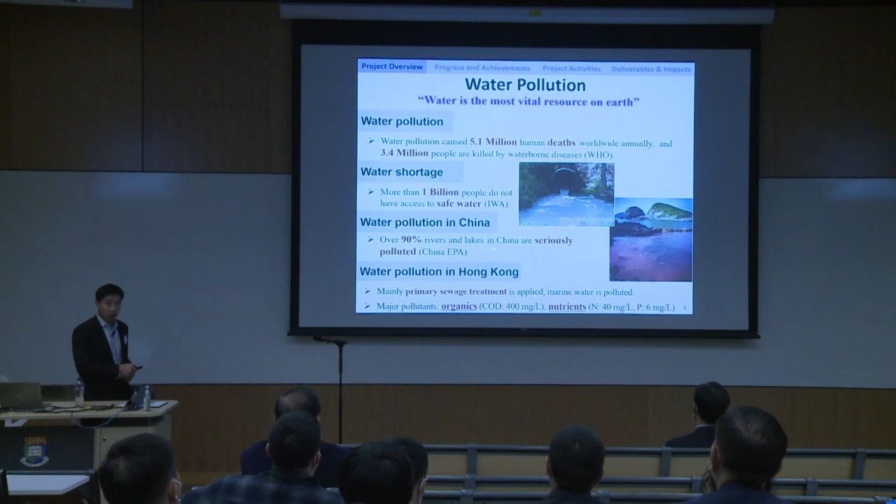It's very important because water suffers from problems like water shortage, and water pollution worsens the shortage problem. Water pollution in China is a big problem. In Hong Kong it's better, but not much better—still a problem to solve. So that's a big background.

Talking about water pollution, there is an effort for water pollution control—in our field, basically wastewater treatment. Each person in Hong Kong, and in other places in a similar situation, uses water and produces or discharges wastewater. Every single person in this room discharges like 200, 300 liters—a lot of wastewater. Someone's got to do that, to clean it up, to protect the environment.

For this effort of water pollution control, look at this—this is Hong Kong. Hong Kong discharges a huge amount of wastewater. It's not just a one-time thing, it keeps coming—today, tomorrow, 2 million cubic meters of wastewater. So current treatment is one treatment method, and what we try to treat and remove is to clean it up.

Basically it's for the removal of nutrients. From the earlier talk we learned about nutrients—they cause problems, nitrogen and phosphorus in particular, and organics. Those are dirty things in wastewater that need to be cleaned up and removed, to produce purified or treated water for discharge. And emerging organic pollutants—we didn't really pay attention to those 20 years ago, like EDCs. Now they're a focus of research in recent years because they cause long-term impact on the environment and the ecological system.

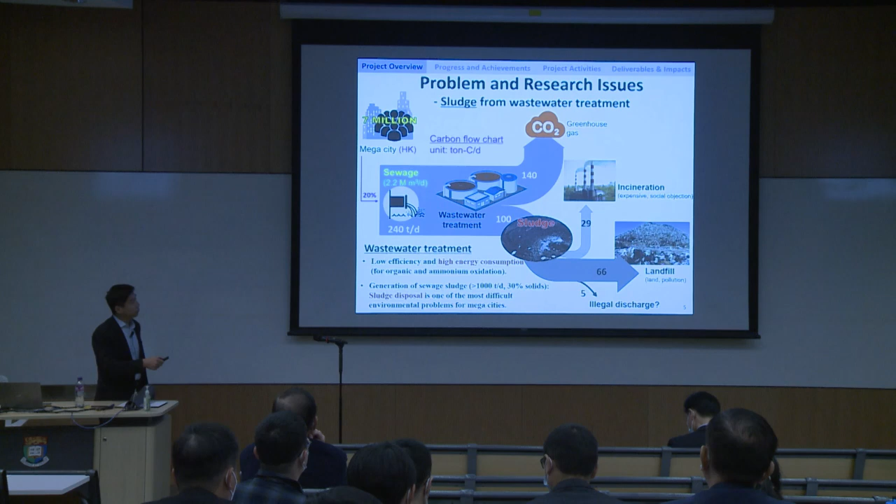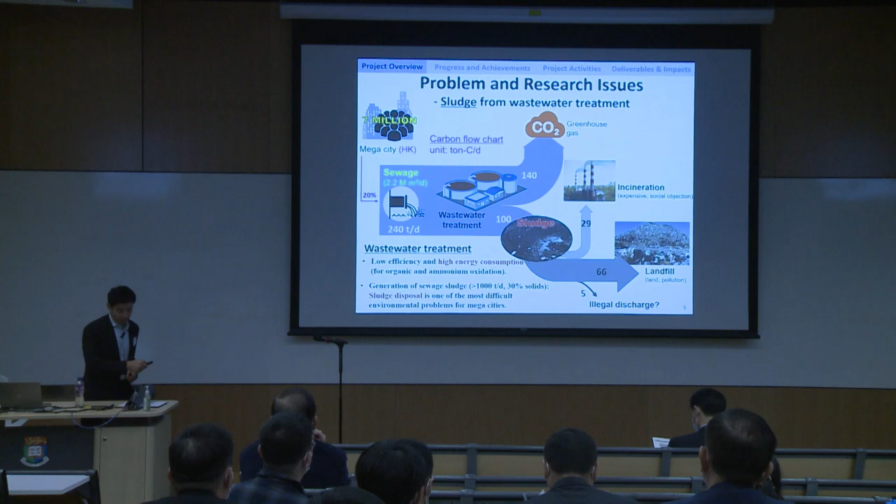So current practice is like this: a conversion of a problem from one problem to other problems, like carbon dioxide emission and sludge generation problem. That's the description of the problems.

With this project, what we want to do, that's back to 7 or 8 years ago. We formulated a team, discussed the situation, looked at the problem, and wanted to develop a new approach.

So the so-called new, excuse me. Yeah, I don't have other problem, just an allergy, okay? It's really allergy, don't worry. My family doesn't worry about this.

Our approach is this: we're still doing wastewater treatment, someone's got to do it, we are doing it. But the approach is not carbon oxidation, organic oxidation, not sludge production - it's resources recovery, resources recovery.

Look at the term organics - we're eating organics, organics must be a good thing. Organic good things, nutrients, fertilizers, those are good things, you waste it, translate to other problems to the environment. So why not recover it? You still separate, still remove, but concentrate in a good way and convert to value-added product.

In terms of proposed approach, this kind of, we say is attractive, promising approach. So what we want to achieve with this project, we did it early. Now almost all the people in this field talk about resources recovery, this or that, but we brought up this term a little bit early, and we have the good support of this theme-based project.

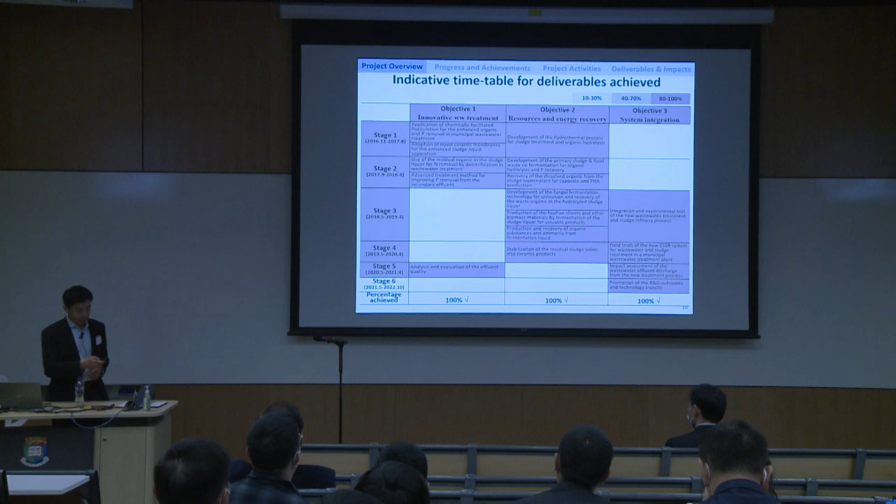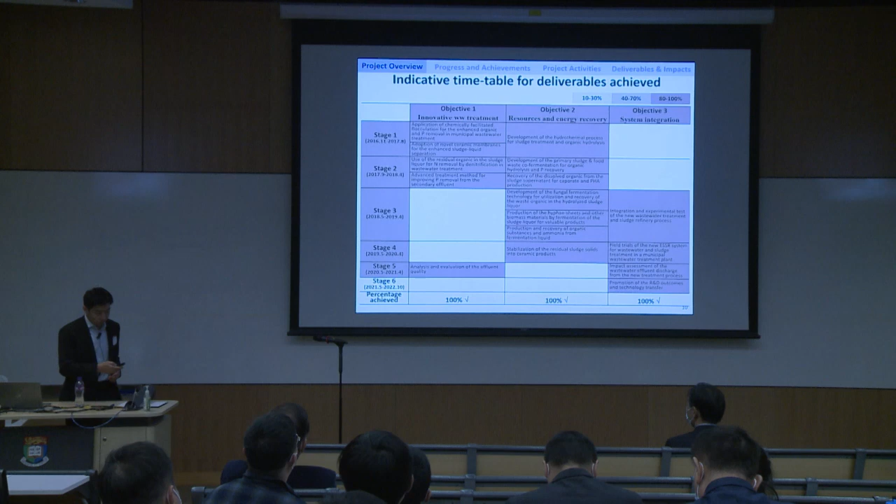So this is not my table, it's the table designed by RGC. We follow this: objectives, research programs, research tasks, and stages from 1 to 6. So that's basically where we are right here. The project really completed in good terms.

Then, we want to convert waste into resources, valuable products. So how to do it? What product? People would ask this naturally. Sludge - follow my early slides - we want to convert waste organic to organic acid. Organic acid, go one step further would be PHA or bioplastics.

So it's organic to organic, dirty organic to good organic, and ethanol - ethanol is another energy product. And the biofibers, how to get biofibers, I'll try to cover that later. And the fertilizers, phosphate and ammonia, nitrogen. So those products we aimed at from the very beginning or during the project course.

Okay, getting to the technical part. So traditional, so-called conventional wastewater treatment: primary separation produces sludge, then biological treatment. Biological treatment is a major component of wastewater treatment. Within this stage, 8 to 16 hours, organics are oxidized, nitrogen is converted to nitrogen gas, and phosphate is fixed into sludge. So all those major pollutants are oxidized or discharged, wasted, then you get purified water.

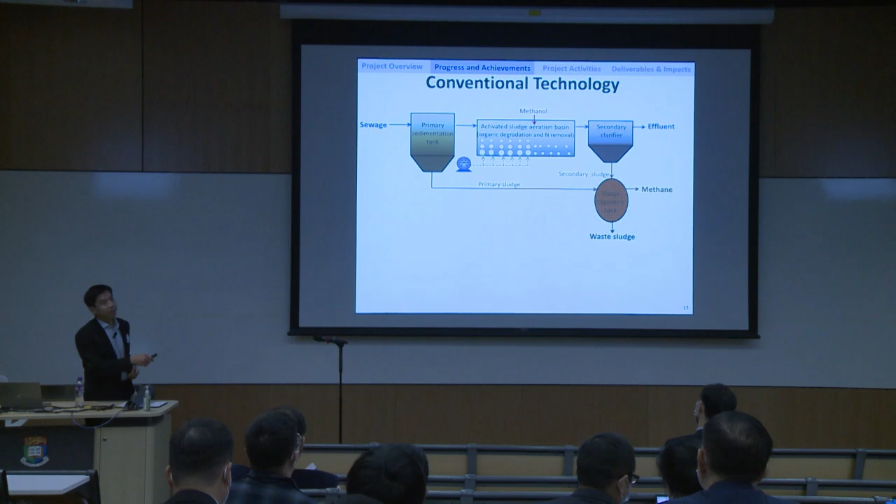We follow the treatment scheme, but at this point we replace conventional sedimentation with membrane filtration, ceramic membrane filtration. Separation was okay with primary sedimentation. In Hong Kong we use chemically enhanced sedimentation, still good, better than this. One step further is the utilization of new material, ceramic membrane, for separation.

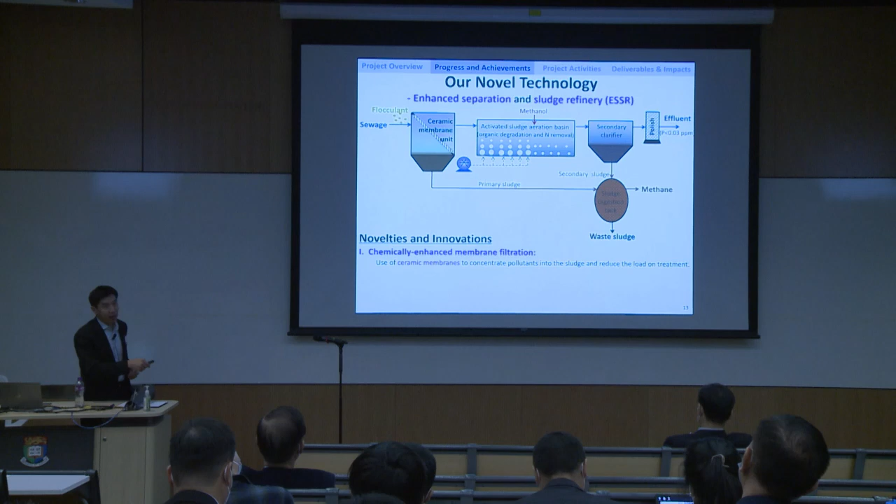We don't want to oxidize organics. Organic material you want to separate and convert it to sludge and perform recovery. That's the whole package, focus of the research program, as you may recall. So chemically enhanced membrane filtration to get the sludge and the concentrated pollutants. Pollutant is the bad term, but in our view those are the precursors of resources.

Then side stream acidogenic fermentation, as I mentioned, converts organic to organic acid. From this statement you would agree that's a simple conversion, it can be done without much effort, because you leave organic there and it turns to organic acid anyway. But if not sufficiently concentrated, it takes a long time and the conversion efficiency is low. With this kind of concentration, this step is almost automatic, and low cost.

That is important, and with this separation phosphate can be recovered. Of course, precipitated phosphate is concentrated here and collected, because phosphate, as I mentioned, with precipitation settles here and becomes part of sludge. So how to recover? Remember I mentioned this acidogenic fermentation - pH is low, then phosphate dissolves into the liquid phase for recovery, fertilizer recovery.

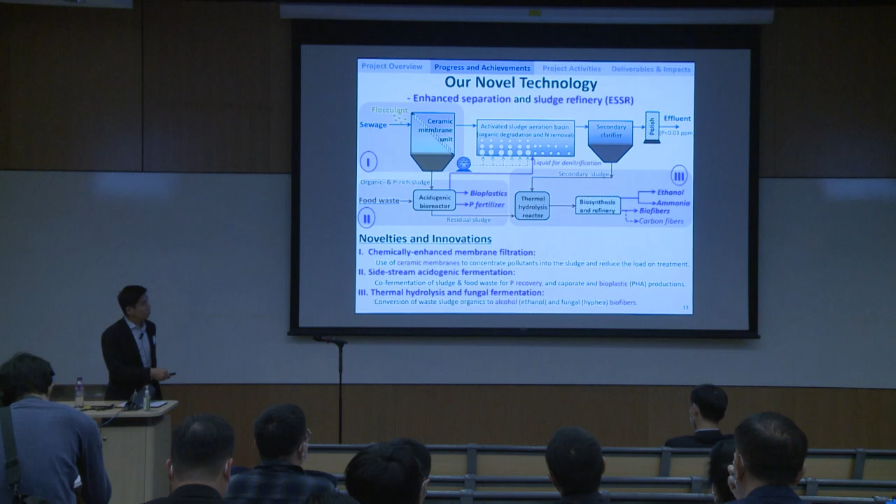Here is the fermentation. Fungal fermentation - we grow fungi, and the fungal biomass is already a product. That is the intention here. Sometimes we also get byproducts, like ethanol. So that's the whole scheme of this research.

Let me quickly give you an outline of these innovations, the focus of the programs one by one. The first one is chemically enhanced separation - this is our new scheme. People would argue, okay, this is conventional treatment, then you build this. At one point I said we want minimum change, then build more facilities.

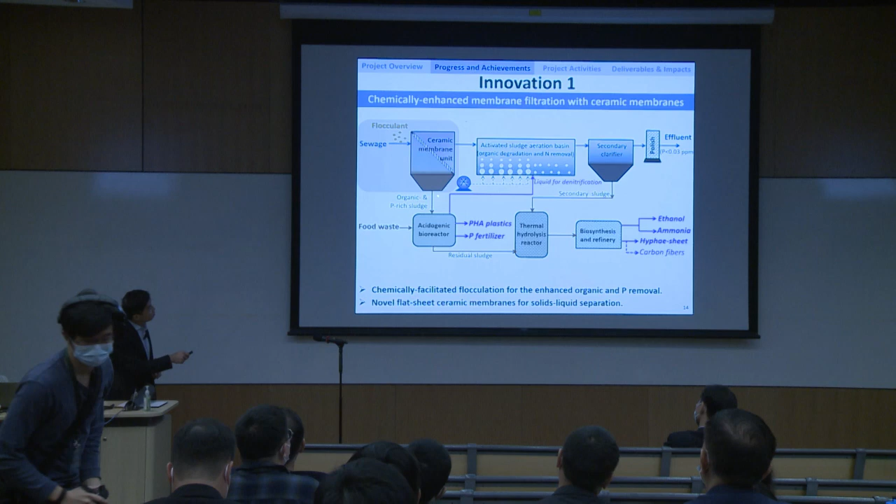It's very different, because this flow is like 100, if I use the number 100, then this flow is 1 - so 1% of this flow. Those are very small units, relatively very small, because we are talking about sludge, concentrated material flow for sludge refinery. That's in the title of the project. Then we convert this material to different products. Those small facilities use established existing infrastructure, urban infrastructure with water treatment facilities, fully utilized, and we add this for recovery.

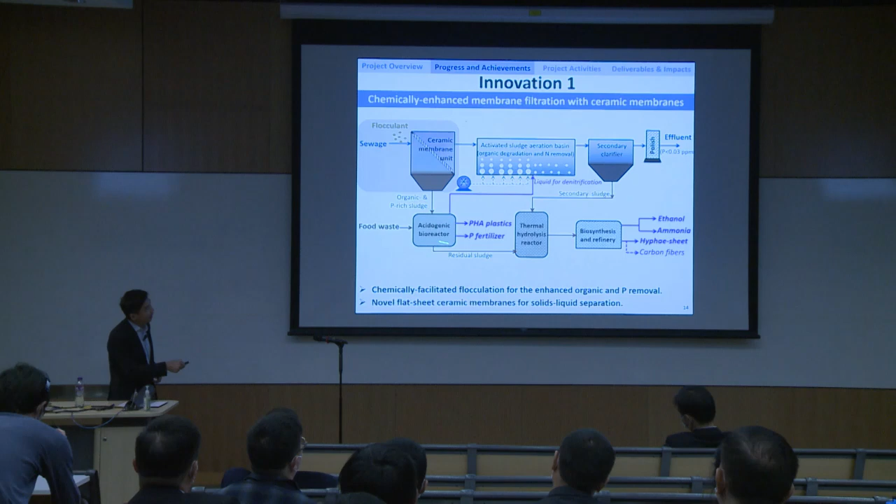So the idea is illustrated here for the so-called enhanced separation - use a ceramic membrane. This is a kind of new product, new in comparison with conventional ceramic filters, which are expensive. The new one is a flat sheet ceramic membrane, the cost is like 10%, 20% of the conventional one, becoming available and affordable. Now it's become quite popular in our field, I mean water purification, wastewater treatment. With this kind of material development, it makes a big difference.

Utilization of this new filtration means, in conventional treatment like this, the whole separation takes 2 hours. With this new separation, less than 15 minutes - within less than 15 minutes it's already done. The separation result is amazing. This is dirty water to start with, and after 15 minutes we get this. We're joking around that 80 to 90% of wastewater treatment work is already done by just one step, 10 minutes filtration, thanks to this new material, the flat sheet ceramic membrane.

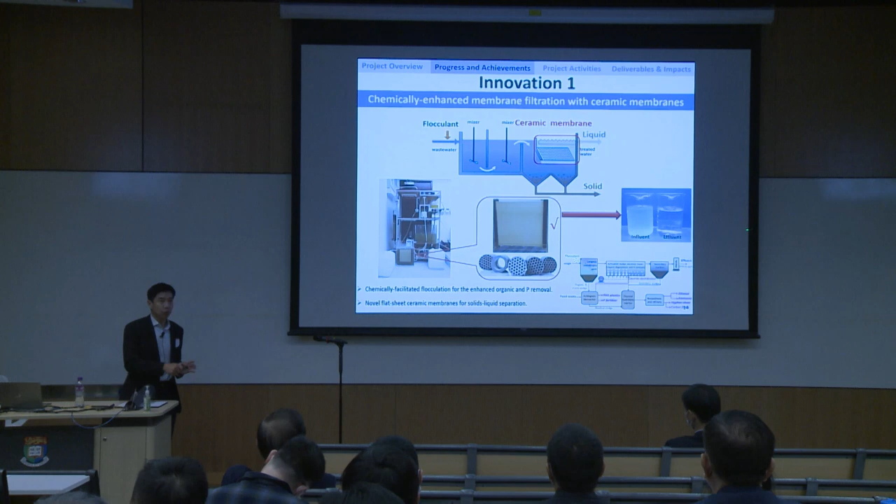Okay, very happy to see that result. It really worked out. So they have this ceramic membrane, and we use it for our treatment.

So what is our contribution? Well, things are not that easy. You really put the ceramic membrane into our treatment facilities, as I mentioned, the wastewater tank. It didn't work, because of membrane fouling. They are designed for clean water production or water reuse, not for wastewater treatment at a very early point.

So it didn't work. Look at this, this is an indication of fouling. It's basically pressure increase. For filtration, you need suction, right? You need to press water through the filter. So the pressure increases like this. Less than 1 hour, the whole thing is basically blocked. It didn't work. The idea is good, wishful thinking is good, but it didn't work.

Now what we did, that's our expertise. We do the flocculation, coagulation, basically chemical enhanced separation. With a little bit of dosing, really little chemical dosing, those are not expensive chemicals, iron or aluminum, we call it coagulant or flocculant. A little dosing and you see the extension.

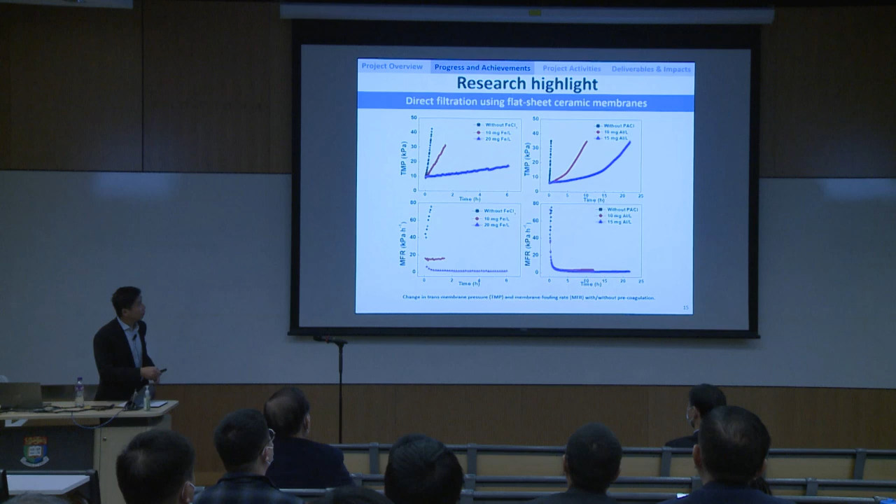Cleaning is easy, it's back washing. It's not really like a washing machine type of cleaning. It's just back washing, and the membrane is recovered and ready for the next cycle of filtration. So with that, we made a big difference, making it workable for wastewater treatment, really for the very first time for this kind of utilization.

Another related point, I didn't really talk about removal of conventional pollutants. We are happy to see the filtration - the result is good, it certainly works. But even for EDC, there's long term attention in the scientific community and even public attention on those.

So with this chemical flocculation, basically it's a grab that really attaches to those pollutants, different pollutants. In old days our focus was again particulate matters, organic, non-dissolved organic. Now our team member, Professor Kenny Liang, found it also attracts and captures EDC into the sludge. So all that separation is good. We are happy to say this because in terms of treatment, 5 or 10 minutes of flocculation is simple treatment, but makes a big difference.

So those are the results. The research really tracks the removal of not just organics, but those chemicals. There's a different type of chemicals, and the removal result is better than expected. Again, happy to report this part of the study.

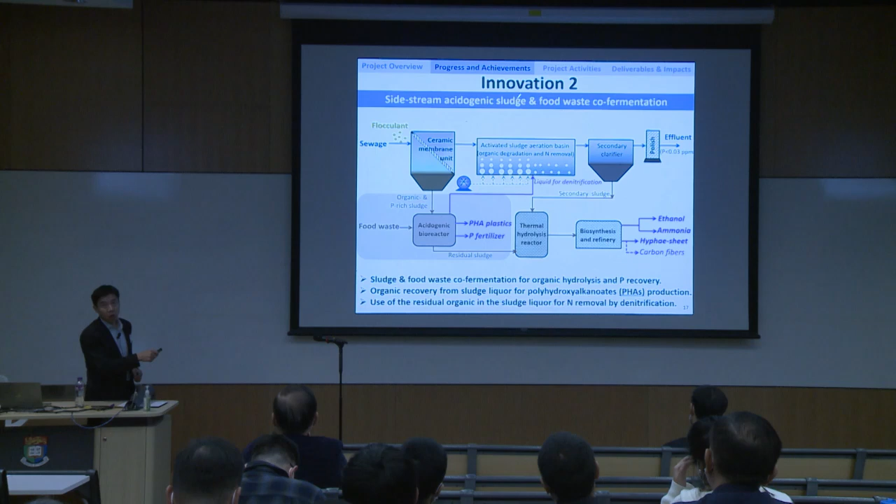And the second one, acidogenesis, fermentation. Those are dirty wastewater - you saw my photo. So dirty wastewater, after a layer of filtration, 20 minutes later, purified water is produced. So where do the pollutants go? It's here, 100 times concentration. That's really what we want to achieve - 100 times concentration, got concentrated organics.

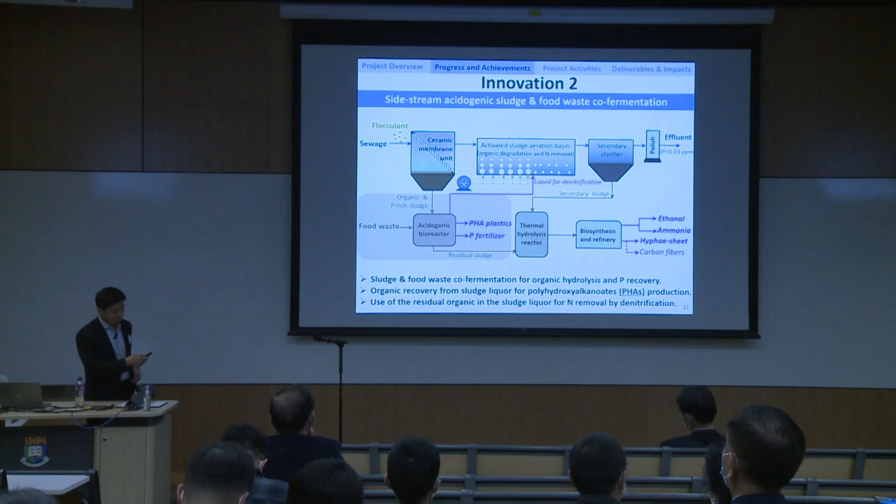Then the following part is easy. It's fermentation - you do long-term acidogenic fermentation, actually doing nothing, just leave things there for 2 or 3 days. It's converted to organic acid, volatile fatty acid, organic acid. Those dissolved organic acids can be easily separated, again by membrane filtration, and additional value-added conversion is this.

VFA is already good, it's already one product that can be used for different applications. But to make a high-sounding story, we convert VFA to PHA. PHA is bioplastics. Nowadays this is a very attractive product, and the good thing is it's really waste to product, and this is biodegradable organics.

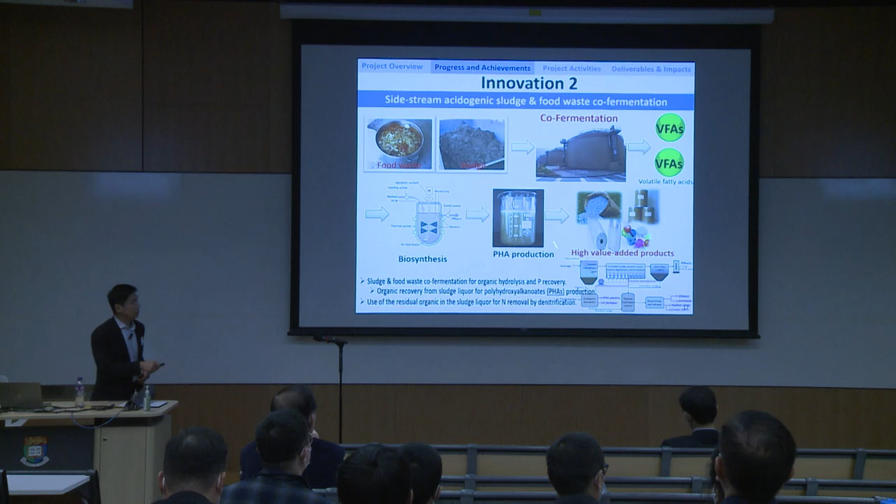So the recovered product, including VFA, can be utilized for different purposes. Quickly, I'm going to show one application - this PHA production is attractive because the usage of plastic is not really encouraged, and bioplastics is going to be more and more popular, going to be encouraged. This is really working in that direction, converting waste to biodegradable organics.

And for fermentation, the team did research on the fermentation.

For sludge fermentation, we go one step further. Look at the urban waste. Sludge is one headache, and another one, food waste, is also a headache.

This is really facilitated by the government. EPD is promoting co-fermentation. The term co-fermentation is the solution for two problems: the sludge fermentation problem and the food waste treatment problem.

We combine these two, and it creates a difference, bringing really good benefit. So the research team worked on co-fermentation versus single fermentation and tracked the whole biocommunity change in relation to the fermentation performance.

Two things we are looking for: number one, production of organic acid. Number two, with this fermentation, as with acidogenesis and the pH drop, phosphate release. So phosphate is released, and that's ready for recovery.

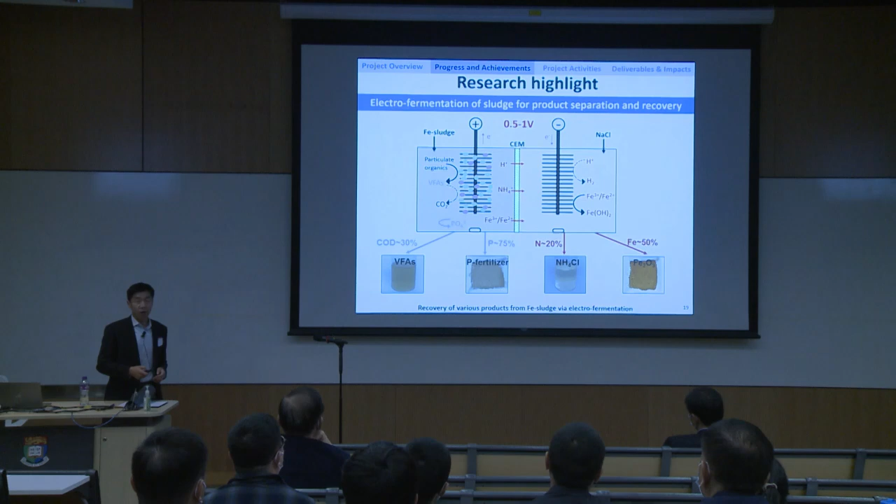At one point I mentioned using membrane filtration to get organic acid. That part is good, but how about the others? Phosphate - there's phosphate inside. How to get the phosphate? That's more difficult, more demanding. This electricity setup actually really helps in that regard.

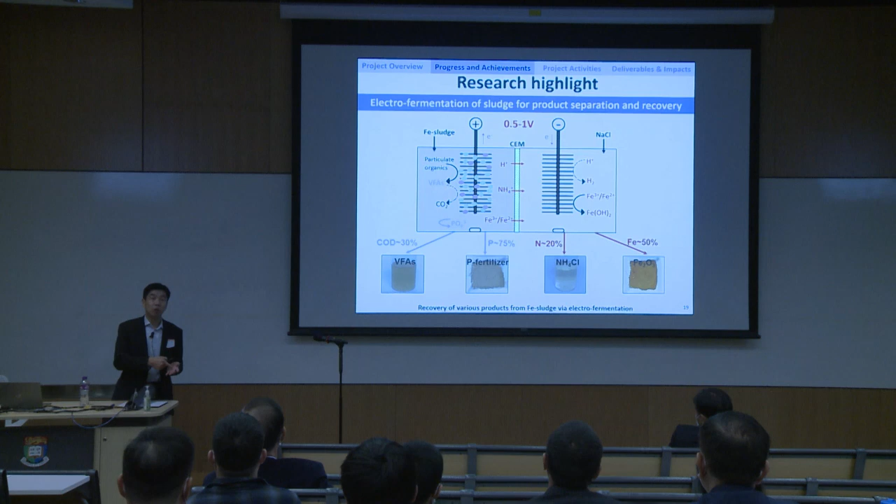With different chambers, with an anode and a cathode, the products can be separated. Ammonia is separated, iron is separated, phosphate is separated, organic acid is separated. Because they're in different chambers, in different forms - some dissolved, some precipitated - that's already good separation.

One internal usage of the product - one example we've actually already adopted in practice - is the use of organic acid. Where is the carbon source? Use VFA. Earlier I showed this term, this thing is useful even inside the treatment works, for nitrogen removal - denitrification. This provides the carbon source for denitrification.

In our field, on one hand we do wastewater treatment and remove organics - I keep mentioning organics, it's pollutants. But for nitrogen removal, they also need a good carbon source for denitrification. Somehow that's part of nature; you have to go through this direction.

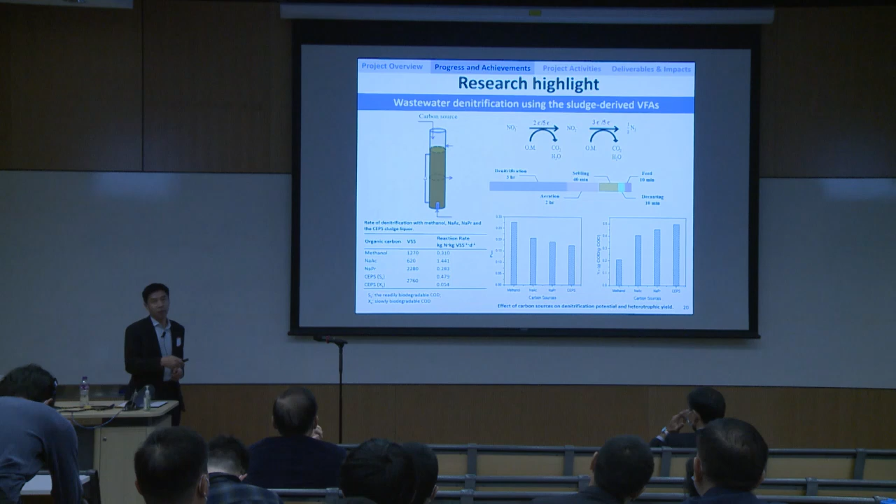Then the treatment works has to buy organics - organic acid or sugar, those types of organics - as a carbon source for denitrification. Certainly that's not really an environmentally friendly or sustainable approach. So this kind of conversion, organic converted to organic acid, provides carbon source for denitrification. That is another utilization.

The third one I'd like to highlight is this sludge refinery. The first two are a little bit conventional, just one step further. This is a big step forward to really convert sludge, because sludge is dirty - a mixture of all those pollutants, difficult to deal with. But we want to carry out a refinery. We like the term refinery - we're going to convert something to more useful things.

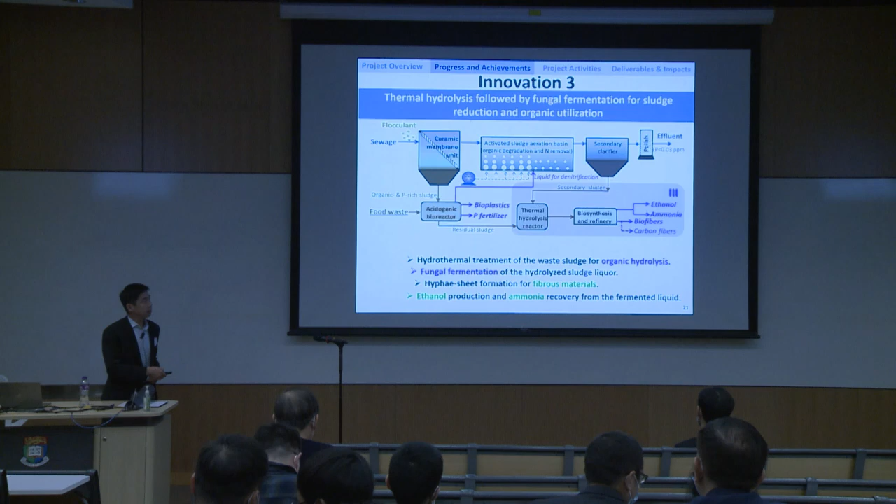Thermal hydrolysis gets the organic solution, then we carry out biosynthesis to produce something. What is supposed to be produced? One example is this. This is sludge - it's really difficult to do anything with this.

After hydrolysis, we get this, and the remaining sludge has low organic content, is much more stabilized, and easy to dewater. That part is good. And the liquid - this liquid has over 10,000 concentrated organics - we use this as a feed. Also, after thermal hydrolysis, it's totally disinfected and sterilized.

There are no microorganisms, so when you put microorganisms in there, they grow. In this study, we do fungal fermentation, putting the fungi species in there, and those fungi produce what we call hyphae - hyphae means fiber things.

Why hyphae things? Like this, that's the product. They grow to a certain concentration, and we capture this, dry it, and produce something like a paper-like product. So amazingly, with this thermal hydrolysis and fungal fermentation, we convert this thing to paper. We call it a fibrous product.

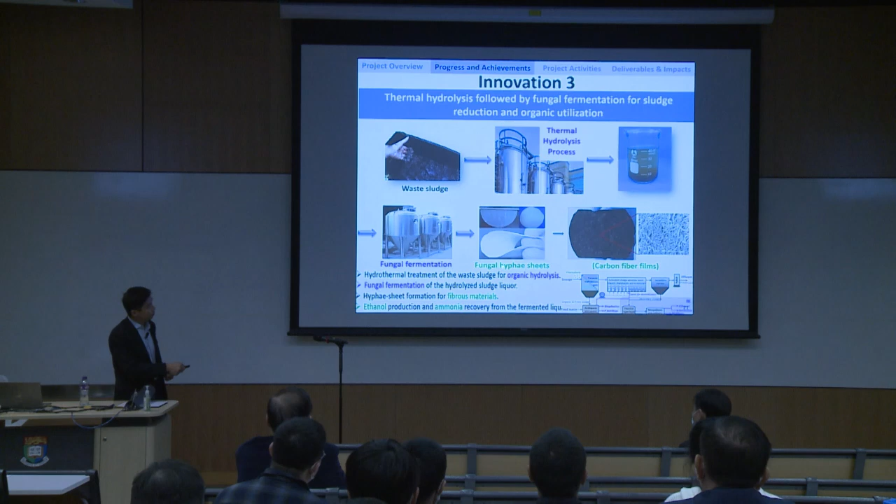And of course it can be paper or packing material - basically capping material. Students did more studies - they converted this to carbon fiber, or carbon for different types of carbon electrodes for battery usage. This is another long step, but we're happy to say it's workable: hydrolysis and growing fungi species produce fiber product, and after drying, we convert this product to paper or packing material.

And more specifically, thermal hydrolysis. It sounds scary, but it's not that terrible because it's like 160 Celsius, below 180. It's already commercialized technology, not used in Hong Kong. Started in Europe and adopted in the US, Japan, and now it's quite popular in China.

Because Hong Kong uses sludge incineration, as you know, we already get into that direction. You're not going to do too much work for sludge utilization, it's already incineration. But in some other places, they want to utilize the sludge better.

Okay, I only have 3 minutes. Yeah. Okay, sorry, terribly sorry, I only have 3 minutes. I still have half of my slides. Okay, sorry Camille, that's messed up.

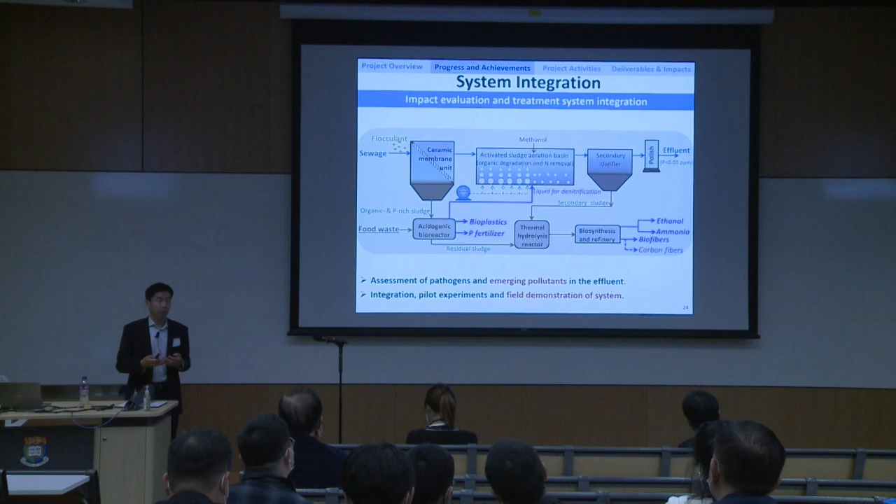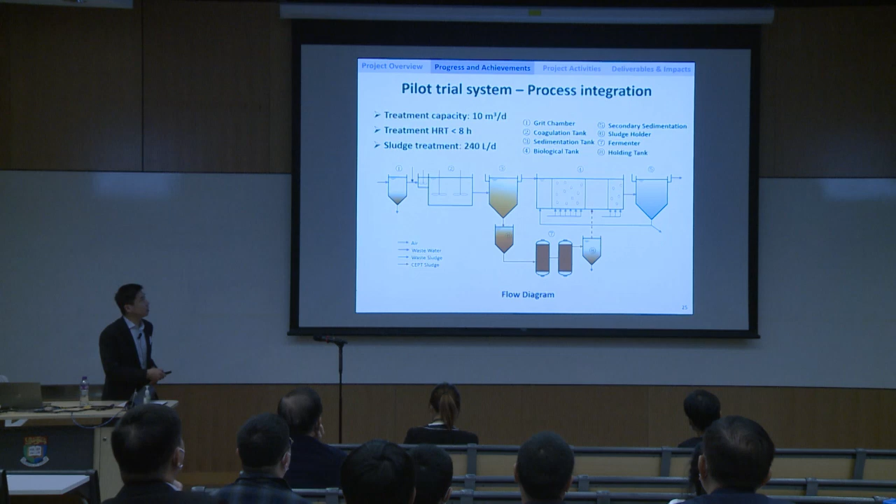And the system integration - those are the focused development, problem-based or innovation-based. And at the end of the day we talk about wastewater treatment. We need to present the full package for the practice and also for this project. So that's another task of this project. So integration - as I mentioned, we have good elements here and there, filtration, conversion, this or that, need to be integrated together, and we carry out the pilot study.

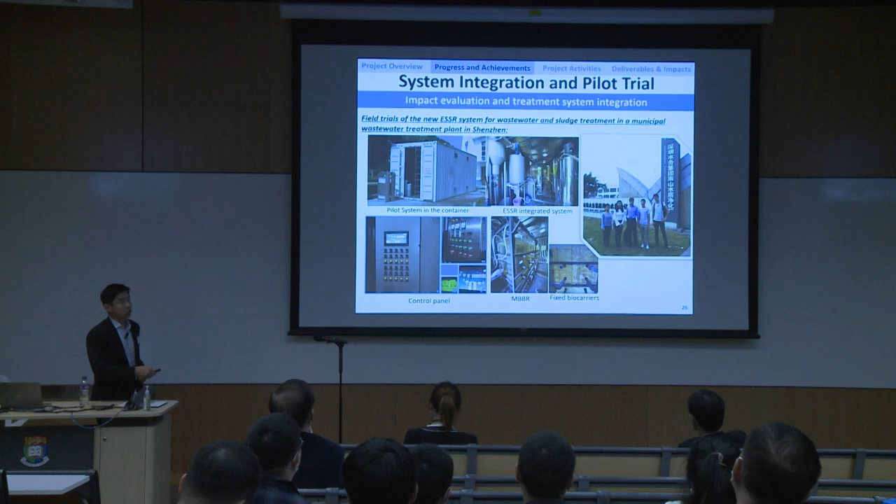So that's integrated - it's no longer lab beakers and reactors. It really needs those reactors, automatic control bioreactors, this or that, carried out in a wastewater treatment plant in Shenzhen over the past 2 years.

I still have a few research highlights from members of the team on different aspects of the research. Maybe I'll just give a quick overview - it's already a highlighted overview. One is phosphate recovery. Now it's a popular topic, very popular topic. So we try to close the loop of the so-called circular economy or sustainable circulation.

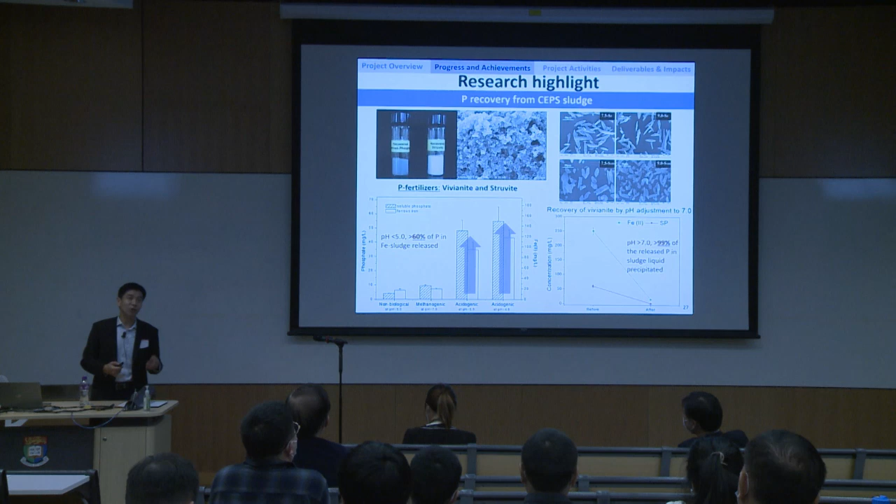So you talk about phosphate - it's a very valuable resource. It's going to be used up. Many years ago I never heard of that, but now I really worry about this. It's going to be used up in less than 100 years. No, I shouldn't worry about that - it's 100 years later, but it still matters.

And PHA production, as I mentioned, Professor Low did this, and WSD is really interested in this technology for phosphate removal and recovery. Still on this topic, removal and recovery.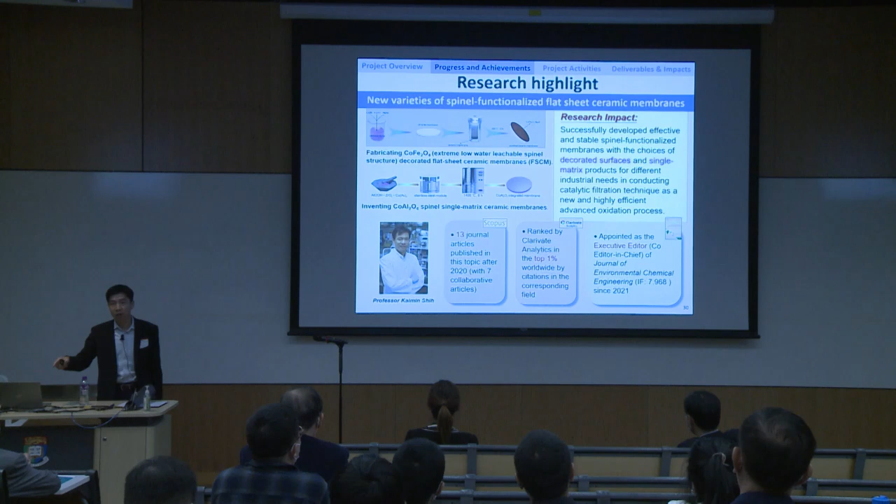Professor Shih did this to convert waste to ceramic for waste stabilization. And you heard ceramic - you may recall I mentioned the term ceramic membrane. So you see there is another cycle from solid waste to ceramic membrane for the utilization of water purification. It's a wonderful loop.

Another innovation is the combination of filtration - advanced filtration - and catalysis. So treatment and filtration, basically separation and degradation, combined in one cell.

Talking about EDC and emerging organic pollution - emerging pollutants are all different types of pollutants. The team did this, Professor Zhang did this and published it. It's not a really huge publication, but it really attracted attention from this community because people worry about this. We have a long list of emerging pollutants, hundreds, close to approaching 1,000, so which one is more important and should be taken care of. He did a study and gave a priority list of these pollutants.

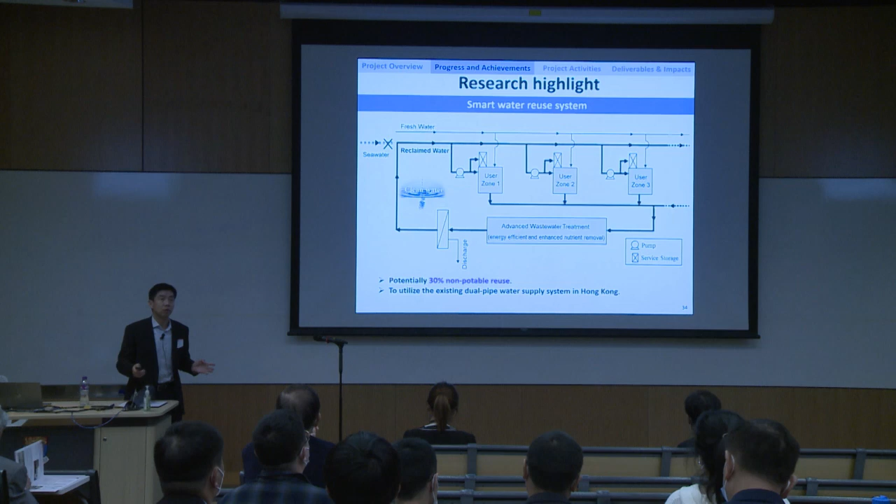And modeling work, water reuse - I have no time, but it's really a byproduct of this theme-based research project. Hong Kong has a really unique feature for water reuse because we have this seawater toilet flushing system - the dual piping system is already there. Other countries don't have that setup, but Hong Kong already has this foundation infrastructure for this kind of water reuse, but not just for toilet flushing - it's going to be expanded to different uses.

And global impact - Professor Kenny Liang is carrying out this program under the UN. I heard the whole country of China has one team, and Hong Kong already has one team joining this for global estuarine monitoring.

A lot of activities, happy time, and then affected by pandemic, but we still carry out regular meetings, workshops, every half year, and we really keep this going. Members really learn a lot from each other, good interaction, at the same time stimulation and promotion, for the delivery of a good product.

And those are another key thing - we were invited by the HKIE to publish this special issue. Not special, they call it a theme issue, on water pollution control and resource recovery - one of only 5 theme issues in the past 20-some years. So it's happy to see this local attention on our research outputs.

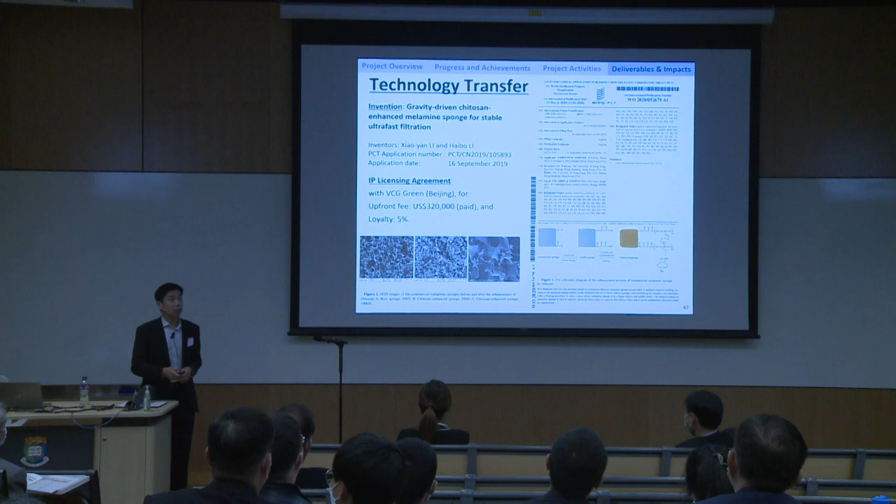That's talking about the circular economy - that would be good, and also media attention, and it's a benefit. That's all in our report already. So again, it's not just saving, it's really about resources recovery, and that's among the earliest of such studies.

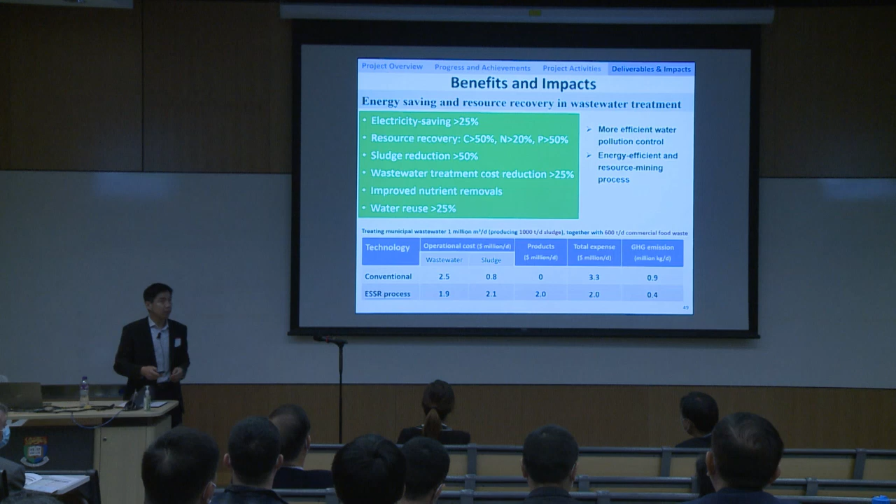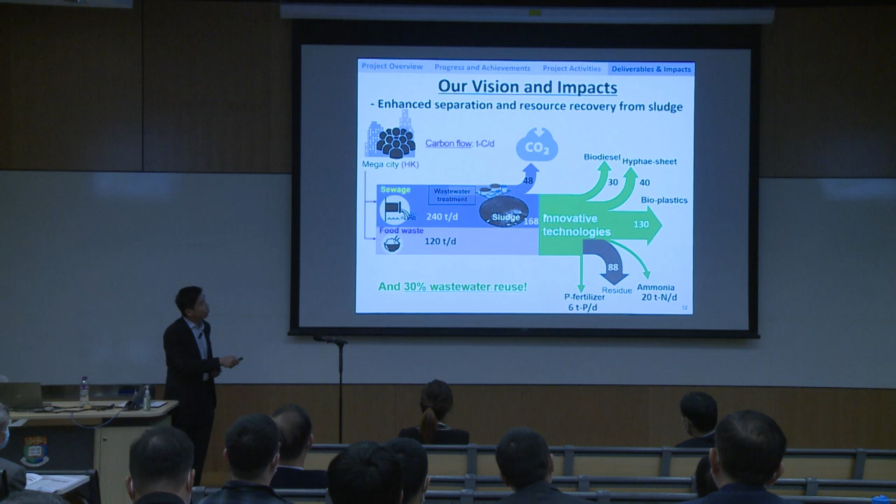in Hong Kong, in China, or globally. We are happy to deliver all those results, and eventually - I just gave a breakdown of this earlier chart - what we are thinking is to reduce the sludge production, and recover different forms of organics as a product for in situ utilization or for resources recovery. That's our vision of the research of the whole team.

Otherwise, the urban environment would turn into this - submerged in sludge. You get 1,000 tons every day, like this. Okay, happy to say that. With that, thank you, and of course, thank all the team members.

Thank you much, Professor Li. I think your presentation addressed Professor Chen's questions - how can we be at the upstream to really reduce the pollution's release? Maybe let me have a quick questions from the audience, if there's any.

Okay, sorry for the time management. Right, the old team members give me material - well, you're working with... that is the situation. Questions from the audience? Maybe we'll have one over there.

Thank you, Professor Li. It's still not that upstream - of this project, do you have any suggestion for the discharging policy in Hong Kong or in this area? What kind of thing can be discharged, can be found in the final sludge for your, say, recovery refinery? Probably you have some comments, some suggestion for the source reduction.